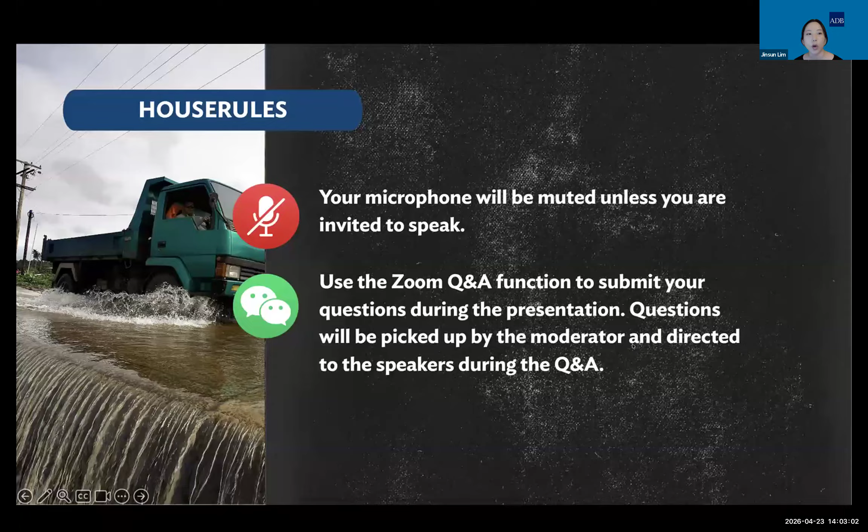This topic is very familiar to me as I was working on it together with the two presenters of today, and we have prepared good manuals on this. As we all know, the increasing impacts of climate and geophysical hazards on road infrastructure pose a significant challenge to roads. To address this challenge and strengthen resilience of roads in Papua New Guinea, ADB has been closely collaborating with the Department of Works and Highways and other partners in Papua New Guinea.

I would like to introduce two lead specialists for the manuals we'll be presenting today. You might know that Theuns and Ian have attended previous Green Roads webinars.

First of all, Associate Professor Dr. Theuns Henning is the Director of the Research Platform for Climate Adaptation and a Senior Infrastructure Management Lecturer at the University of Auckland, where he is also Deputy Dean International with the Faculty of Engineering and Design. Theuns has been undertaking research projects in the area of infrastructure risk management, climate change, and adaptation responses, and his key areas include investigating the interaction of water and road pavements, identifying drainage needs, and various surfacing technologies for mitigating water impacts.

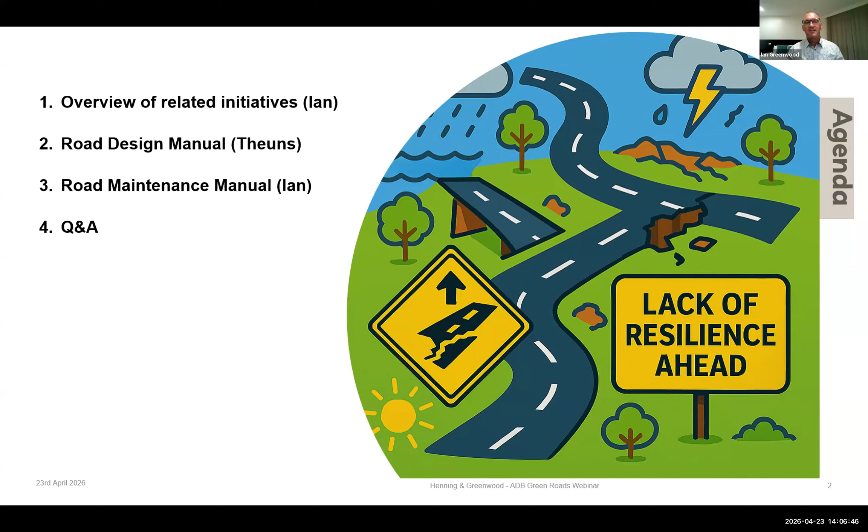It's an interesting slide, this picture here, that PNG's road network at the top end has some very good roads - Port Moresby, and actually up in the Highlands now with a lot of investment over many years, they've got some of their network really, really good. Other parts of their network are incredibly challenged from all the different factors impacting on them. Theuns will go through that a bit more in a while, but we're dealing with a really diverse network here.

Next slide. Against those challenges, PNG is actually receiving a lot of different support from different key players. I don't want to make this sound like an exhaustive list - it's not - but these are some of the key initiatives that we've had to design the manuals around, or with, I guess is a better term, or leverage off, I guess is actually even better still.

So Australia, through the DFAT program, they're up to TSSP3, that's the third iteration of that project funding stream. That's done a lot of work around all the different parts of asset management, supporting the ministry on a day-to-day basis, or the department, doing road condition assessment surveys, asset management competency assessments, and they've been implementing an asset management information system.

They also, around a year ago, in May of last year, released the Climate Change Risk and Vulnerability Assessment Framework, which spans all infrastructure for the government of PNG. Within the ADB, we produced a road asset management roadmap, which brings together all the different initiatives of all the different donors, looking at what needs to be done and who's doing what.

I've been leading a lot of the bridge asset management work, and the work you heard Elco and Travis talk about a month ago, around the network level multi-hazard resilience modelling. The World Bank's been doing OPBRC contracts, ADB has been doing some of those, JICA's doing capacity development, and the government themselves have been doing a lot of work with their Connect PNG program, which is a massive infrastructure program, looking to double the size of the road network over the next 10, 20 years.

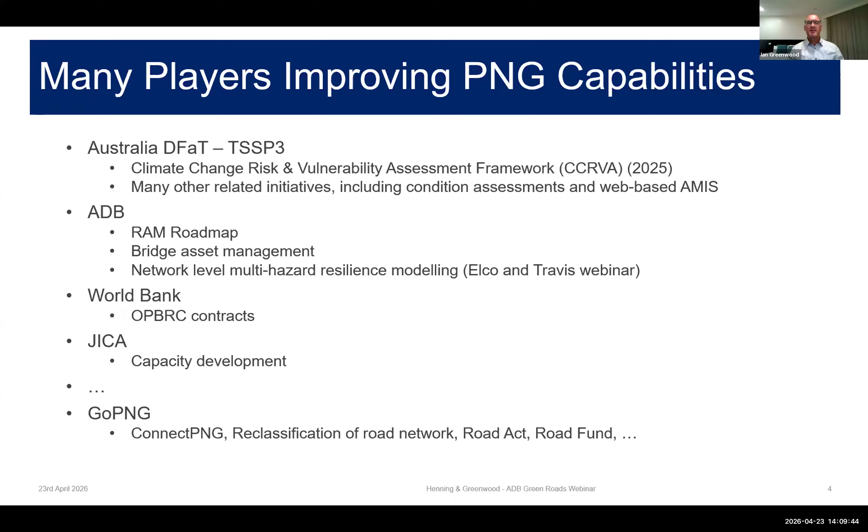They've reclassified road networks, had a strategic road network management plan, done the Road Act, done the Road Fund. The important thing I want to get out of this screen is really, we have not tried to create a manual in isolation from all these different things. What we've tried to do is say, these are all the givens, these are the things we know. So if we flick on a slide, please, Theuns.

So simply put at the top there, we have all these climate scenarios, flooding maps, earthquake maps, landslide maps. Those are fed into the work of Elco and Travis that you heard about, which is our network criticality studies. In the context of PNG's CCRVA, the Climate Change Risk Vulnerability Assessment Framework, that's effectively the top-down approach, that big picture of using those big studies to tell us what we expect.

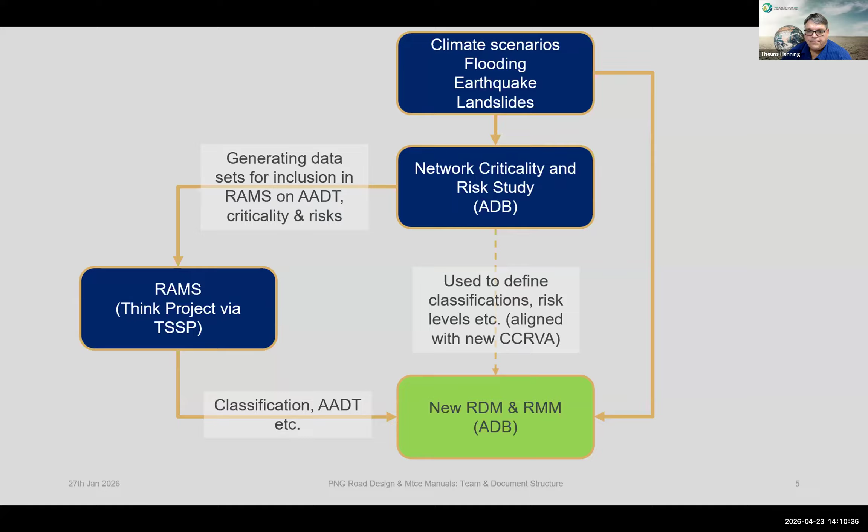That data then has been fed into their asset management system to store it. So we're trying to move away from having reports sitting there that are not usable, but that data then also feeds down into the bottom to give us our inputs to our different design and maintenance manuals. Thanks, Theuns.

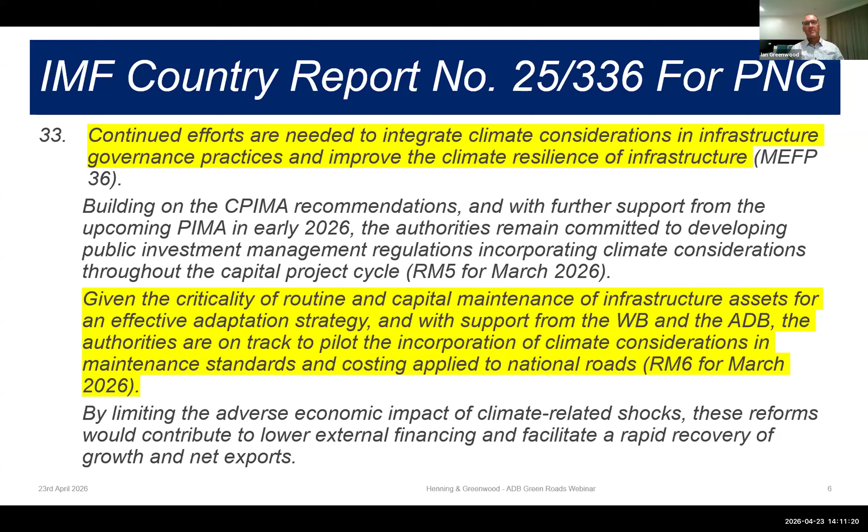The other thing which has been going on in the background is the encouragement from the IMF to actually get climate resilience right across all the different parts of government and into their daily practices. And this was from the 2025 report. The second point there, given the criticality of routine and capital maintenance of infrastructure assets for effective adaptation strategy, support from the World Bank, ADB, the authorities are on track to pilot incorporation of climate considerations into maintenance standards and costings applied to the national roads. So that's very much where we then feed into with these outputs.

And I think Theuns hadn't been to PNG before this, but had worked in Solomons. And then Mananye is the only one who actually hasn't been to or working in PNG for quite some time. Myself, I've been going backwards and forwards for the past decade or so. So over to you, I think that is Theuns.

Thank you very much, Ian. And yes, I can only echo your sentiments around the urgent need for climate resilience in Papua New Guinea, and at the same time also really the good engagement and interaction we had with the government. So I'm going to present now to you the road design manual, and there's perhaps just two comments that I would like to make before we get into the detail.

What I will be going through now is a short introduction into each one of those sections. I'm not going to start presenting all the basics. The purpose of the presentation today is to highlight some of the different thinking and perhaps the focus on climate adaptation and how we brought that into the design manual itself.

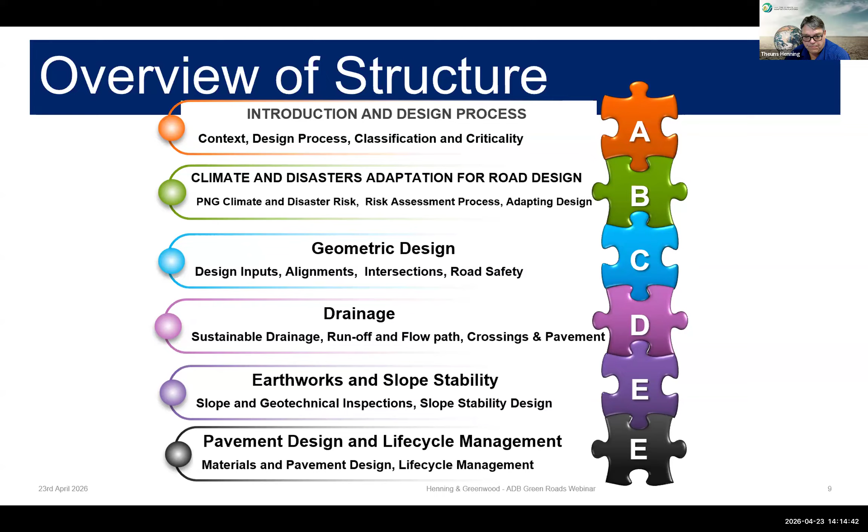Starting off with the introduction, one of the really focus areas for me was to give the designer a strong lead in terms of the decision-making process. We often get the situation that by the time you get to the designer, many of the decisions of the composition of the actual design, the scope and the boundaries may have already been stated, and the designer assumes that is exactly what they have to deliver.

But I think what we try to do with this manual is really to stand back and think, number one, what are the drivers for this investment. It could be a strategic development - typically your capital development works fall under that category - whether you're looking at a rehabilitation, a renewal, a safety improvement, so more the technical improvements, or whether you're looking at resilience improvements. So that's the first point.

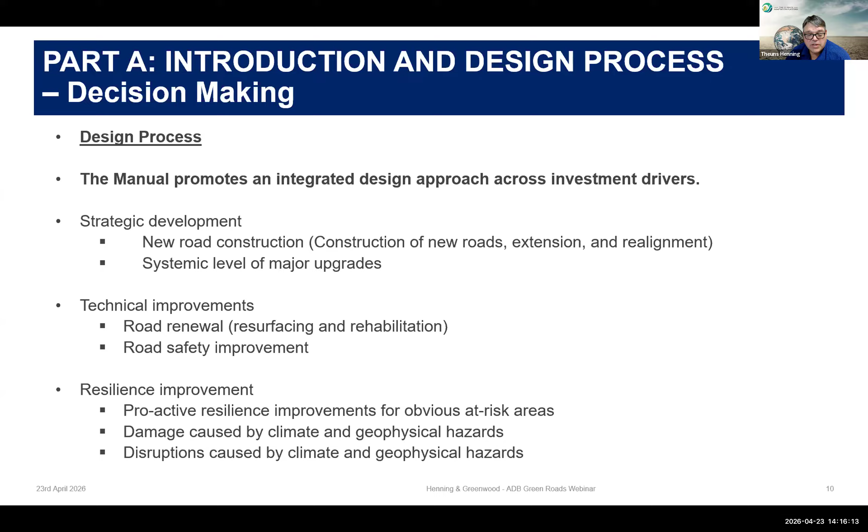The second point is also that we hardly ever do a design for one particular area in isolation. We often have to consider more than one of those aspects when we design, so there is quite a bit of guidance around that decision process in the manuals.

We've also introduced a second component to the road classification. We have adopted the current road functional classification for Papua New Guinea, and there was no reason to change that. But what we have introduced is a resilience classification that overlays the functional classification. As you can see in the table, the functional classification is really there to help the designer understand the design standards and also the intended level of service.

We then also use a criticality rating, and the criticality rating is really there to guide us a little bit in terms of the priority for, say, resilience improvements. For example, you may have two roads that has got exactly the same risk or natural hazard risk, but one road leads to a hospital and the other road just leads into, say, an urban residential area. So obviously the road that goes to the hospital would have priority, even though those two roads may have exactly the same risk.

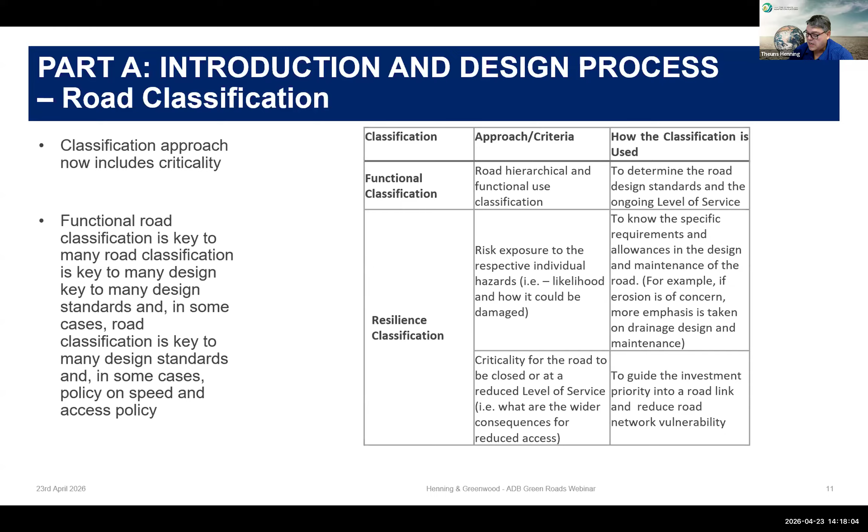Ian, I would like you to just talk us through this slide in terms of the risk assessment itself.

Yeah, so thanks. The CCRVA, the framework that's in place in PNG and which has been adopted by the government, requires both a top-down and a bottom-up approach. The concept we've tried to use is to say, well, how do we make good use of the top-down assessments? The work from ALCO, that study, is essentially our top-down analysis. And in the flowchart, if we work down through it, the first question is: does the actual top-down assessment indicate there is a high risk? This would be repeated for flooding, for earthquakes, landslides, or any other risk you wish to put through it, but it's saying, is there a high risk?

If there's not, then we can essentially do some basic checks. We can check with the maintenance team, we can check with adjacent landowners, and basically say, is there any reason why we wouldn't believe that top-down assessment as being appropriate for this site we're working on?

And if there's not, you can just say that is our assessment, we're working with it. So perhaps a top-down assessment says this piece of road doesn't flood, and you go out on site and go, well, clearly it's not going to flood - it's got good terrain, it's out of the floodplains, you talk to the locals and they say the water never gets anywhere near it. We just want to be able to say, pick that up and use it - that's your result.

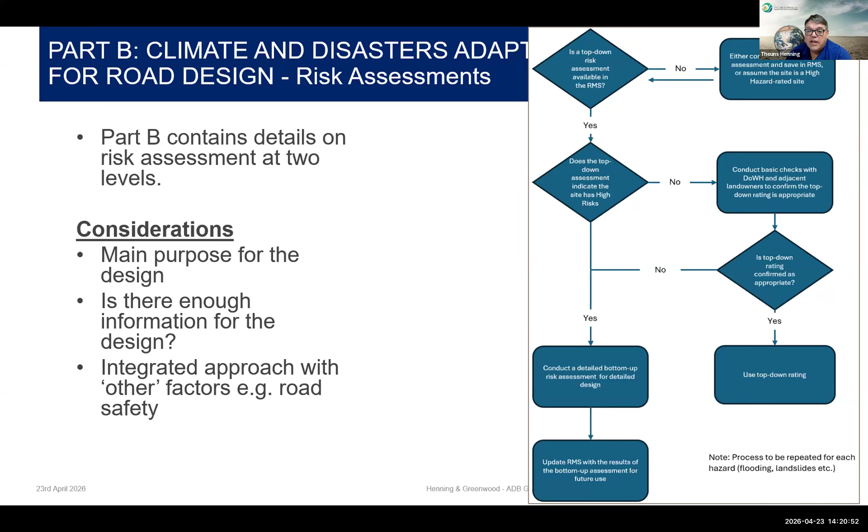In terms of this particular part of the manual, we do cover the exact process of the risk assessment or vulnerability assessment, but often that is done by experts in that area, though it is still there in the manual for reference.

The other area we brought into this part is, once you know what the risk is, you sit back and say, okay, what are we going to do about it? There is a systematic process to understand the appropriate intervention. So typically with a new design, we're going to try and avoid the risk completely, building infrastructure where it's not going to be exposed to future climate impacts.

Then for high criticality roads, we would look at more engineering solutions, treating the infrastructure or applying adaptation designs. For lower risk, we can start thinking about what is appropriate and affordable, doing some pre-event adaptation, and hopefully Ian will get back to this in the maintenance component.

We can also look at protecting our assets. There's then the post-event aspects, where you really have to ask yourself what you're going to replace it with. We're all quite familiar with the Build Back Better or Build Back Different concept, where we think about how to improve future design.

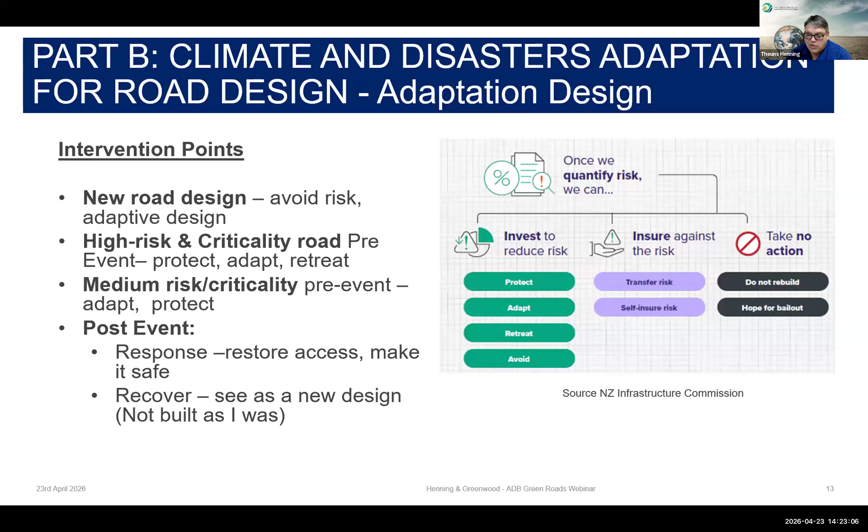We can also think about insuring or transferring the risk through financial means, either taking out insurance or self-insurance. In some situations it may be appropriate to accept the risk and do very little about it, but I'd still encourage focusing on routine maintenance in that area.

We step on now to part C, which is the geometric design and safety requirements. This part is really focused heavily on safety-informed geometric design. The aspects covered include alignment, intersections, pedestrian facilities, and also traffic signs and marking.

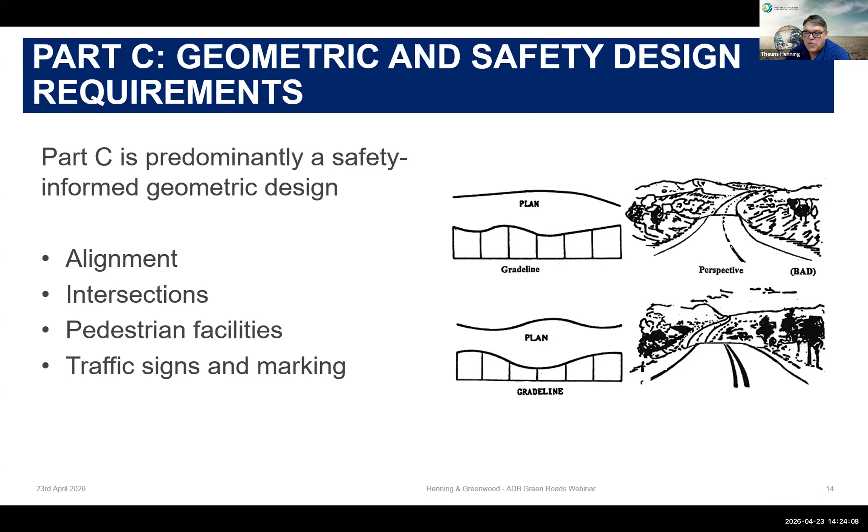The philosophy used is termed the forgiving roads. We work from a perspective that we know things go wrong with drivers. Their vehicle may wander off the road, or there may be some sort of distraction.

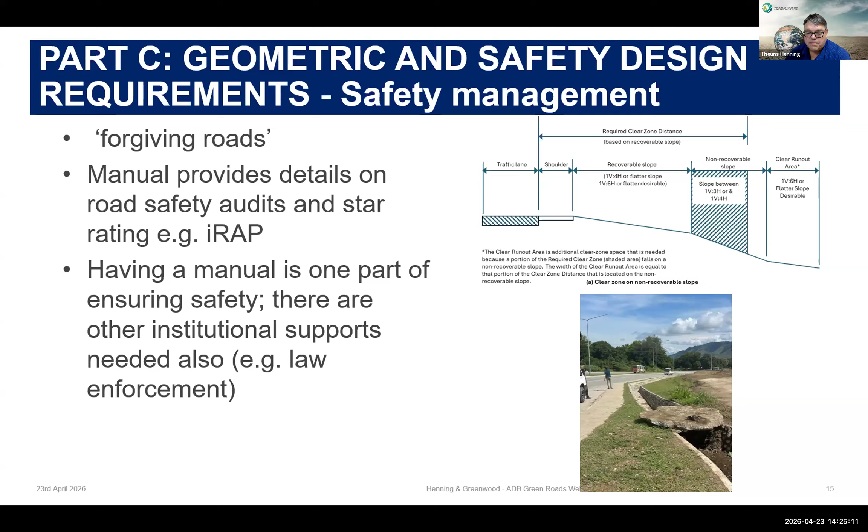Stepping on to the next section, which is drainage design. I think this one in particular is quite an important change, because the traditional drainage design guidelines are mostly based on historic statistics and storm information. We really went beyond that, starting to look into the future.

So there's also a time dimension in this consideration, where you've got to think not only what the situation is today, but with different climate scenarios, what may be the hazard exposure in the future.

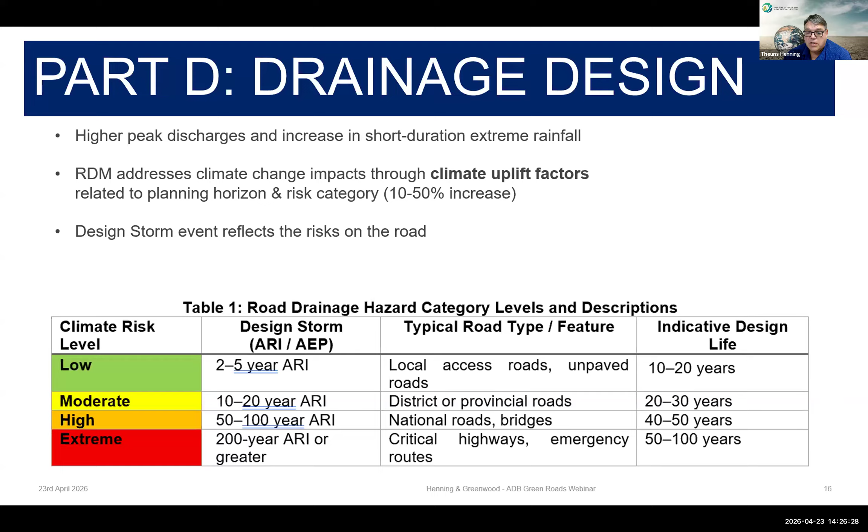Stepping onto earthworks and slope stability, I believe for this section we have largely used material that comes out of Queensland, Australia. They have got very strong guidance in the design aspects and things to consider in retrofitting and stabilizing slopes, and also the typical inspections and surveys required for your slopes.

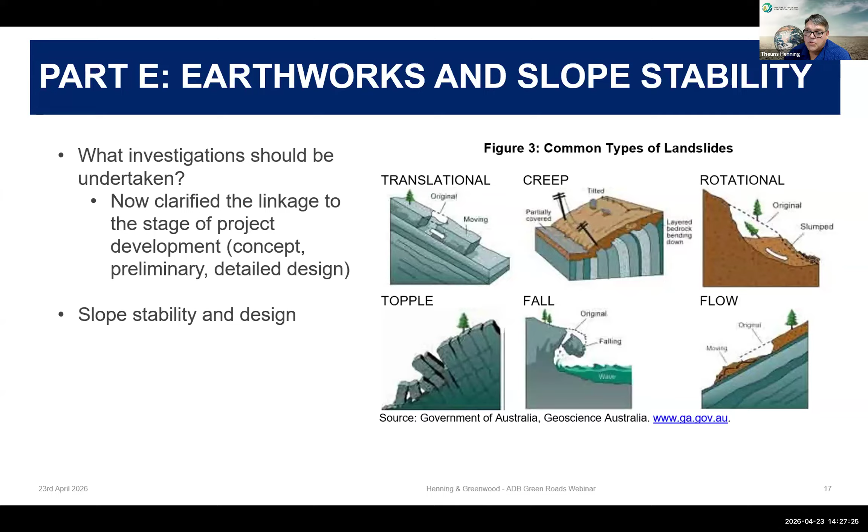This is for me quite an important section. I have done quite a bit of work understanding damages due to storm events, and in roads in hilly terrain, you're going to get up to 60-70% of road closures happening due to slips and rockfalls.

Stepping onto pavement design and life cycle management, there is quite a strong focus on making the right choices of materials and technology for different approaches and situations in PNG. There's quite a varying geology, and of course a difference in the climatic situation between the mountainous area and some of the low-lying swampy areas.

So we've given quite strong guidelines in terms of the technologies to use for varying traffic volumes, but also for climate resilience, the different surfacing type options that fit best for a given situation. So it's not only how to design, but really the first step is what is most appropriate to use in a situation.

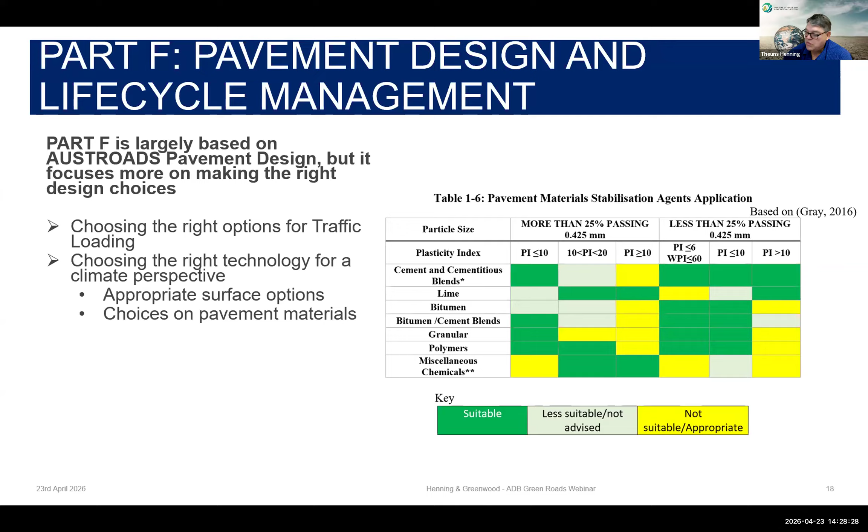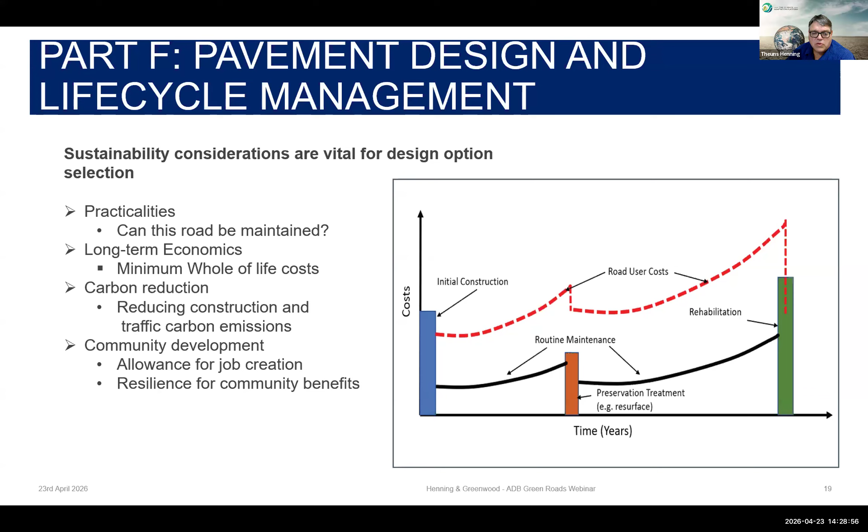We also cover the pavement design and life cycle management with a number of questions in terms of practicalities of the design, looking at long-term economics, carbon reduction for both the construction and in the life, and then community development as part of your sustainability thinking into the future.

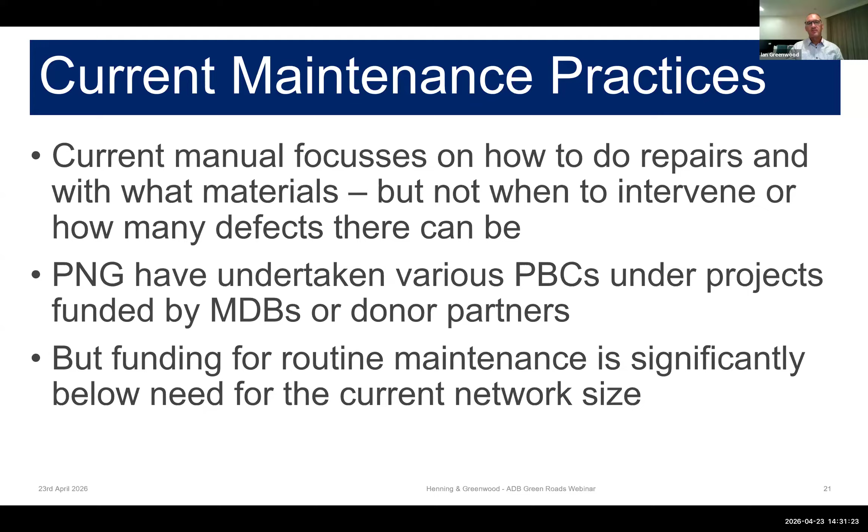So the form of the new maintenance manual that we've looked at - as I said, we're not looking to revoke the existing manuals that tell you how to do things and with what. What we've looked at more is what is an appropriate level of defect for the different risk categories.

As Theuns said, we've moved beyond just saying this is a national highway or this is a district road or provincial highway. What we've said is if this section of road has a high risk rating for landslides, then this is how we should manage the earthworks in that area. Conversely, if it's a low risk for flooding, then we can manage the flooding differently. So we've tried to break it down by the sort of work you're doing.

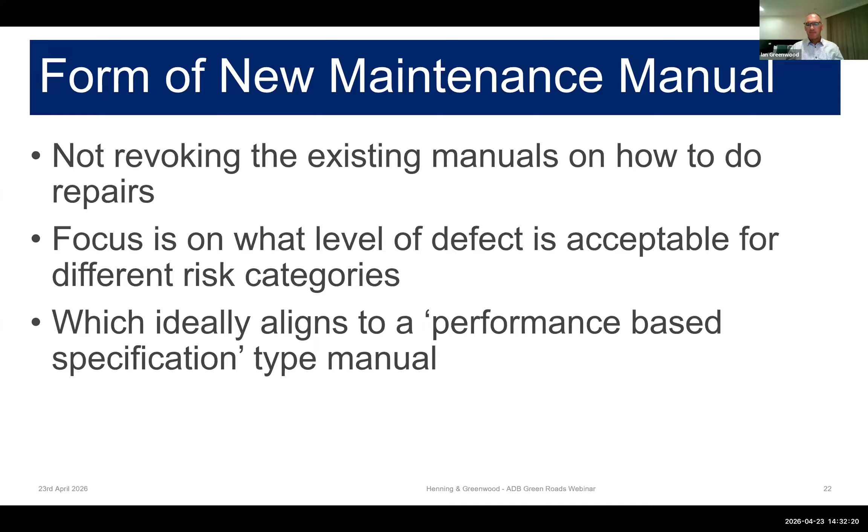That whole approach leads us very much into a performance-based specification type maintenance manual. So the maintenance manual we've got very much aligns with that performance-based approach. There's also an aspect to using performance-based specifications, which go into performance-based contracting, that it's actually a known way to improve the performance of public sector entities all over the world.

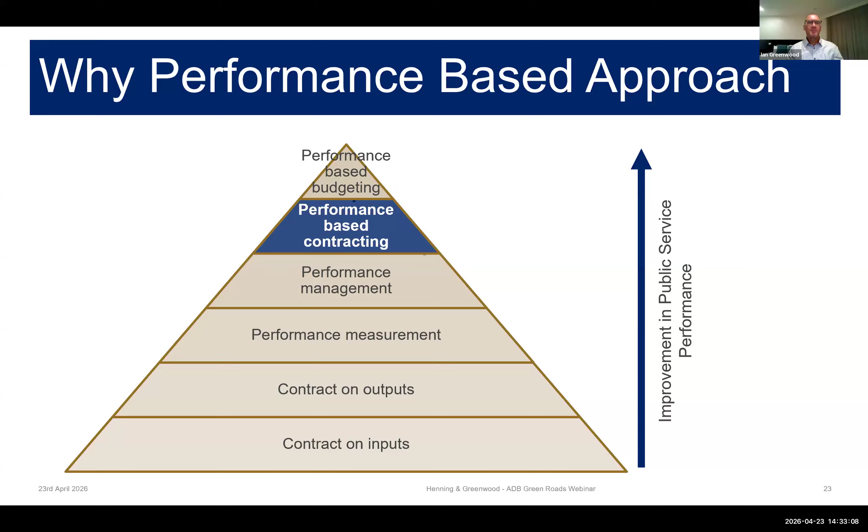Moving from input or output-based contracts all the way through to performance-based contracting is a really good way to drive and improve performance. That's partly because it forces, in this case, DOWH and the government of PNG to think, what do I actually want to pay for? Rather than just doing work and saying I'll spend money until it's gone, actually having that rigorous debate of, I've got this much money, where do I spend it? Where do I do the best with the funds I've got? Whether it's enough funds or not, we should still be trying to get the best value out of them.

Now, it's very hard to say, I filled a pothole, therefore the community's happy, but we're dealing in that middle ground with these specs. Now, the challenge we have had is we've had to deal with the manuals, both the design and the maintenance, in a relatively confined time frame. And we haven't had a lot of time to go back and say, have we set the standards right? So there's still more work to be done to say, have we set our intervention levels at the right level? And does that overall lead to us having the right service outcomes on those roads?

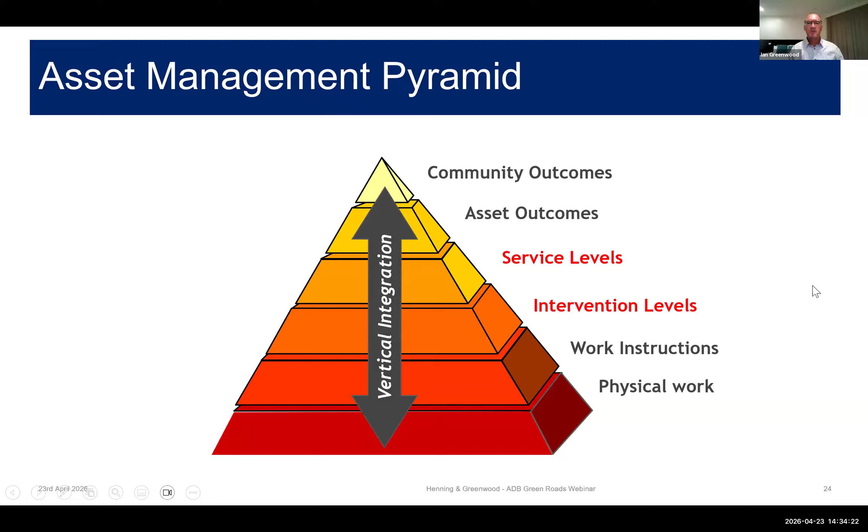The manual itself does assume you've already classified the road as per the road design manual. So that's sort of the given. We haven't repeated that. We've said these two documents share a very common structure. Those who can recall what Tian said about the structure of the design manual will find this one is somewhat similar to it. It's largely aligned with the World Bank OPBRC approach. So again, those who are familiar with that will see terminology consistent.

And we've tried to keep it quite simplified. So rather than having 1,000 performance metrics and everything else, we've tried to keep a focus on a few that we actually think will drive the right outcomes from a resilience point of view and a climate change point of view.

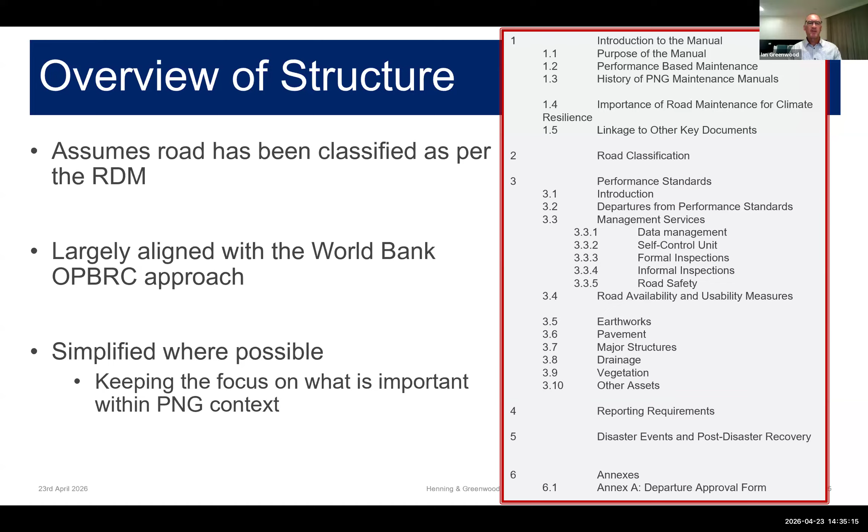The major features you'll see, first of all, is the frequency of actually going to look at the road. It doesn't matter what specifications or manuals you have, if you don't look, you're never going to see there's a problem. And as Tian said, if the road is critical to you, if it's going to a hospital, if it's going to your power supply, your water supply, you need to make sure you're looking at it frequently enough that you know what's going on. If it's a little back road leading into a forestry where nobody's really going, or maybe only traveling very seldom, you don't have to look at it every day. If something goes wrong, it's not the end of the world.

And then we look at our maintenance standards. As I said, they're varying based on the criticality rating of the road, but also varied based on the resilience rating for the given hazard type that's relevant to that standard. And we've suggested that all the high critical routes should have pre-planned detour options to them.

So one thing we know is in the midst of a disaster, whether that's an earthquake, whether it's major flooding events, that's not the time to make your plans. That's the time to put your plans in place. So what we're saying is, as part of the maintenance manual, we would like to see that DOWH have all these different plans in place. So when something happens, the consultants, the contractors, whoever's on site, they say, this has happened, this is how we do this. This is where we put the signs. This is where the detours are. This is who we tell. And when do we take action?

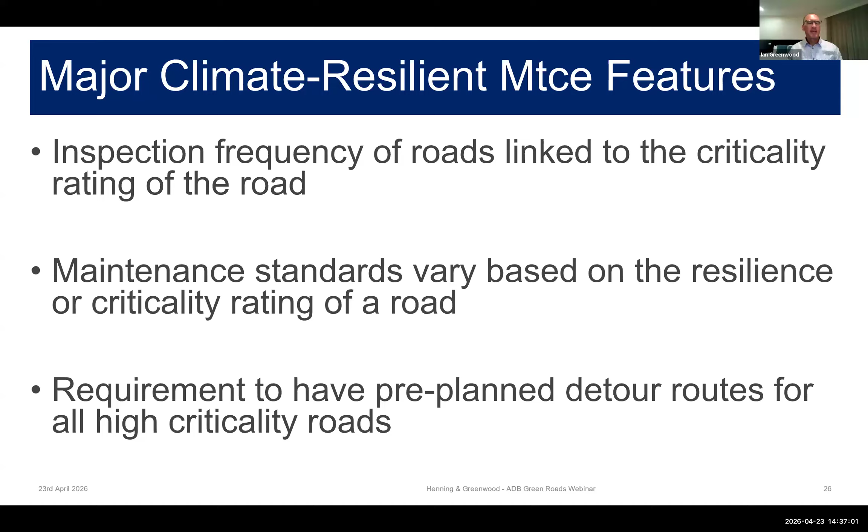As I said, the inspection frequency - if it's a low criticality road, we're saying once per month. Medium, every two weeks. High criticality, we'd like to see it inspected every week. These are formal inspections by the self-control unit, for those who are familiar with the terms, going out and actually saying, are we complying? Do we have an issue? Additionally, the contractor will want to be out there more often, maybe doing daily patrols or otherwise to make sure they comply. But this is our formal inspections to make sure we're compliant with the specs.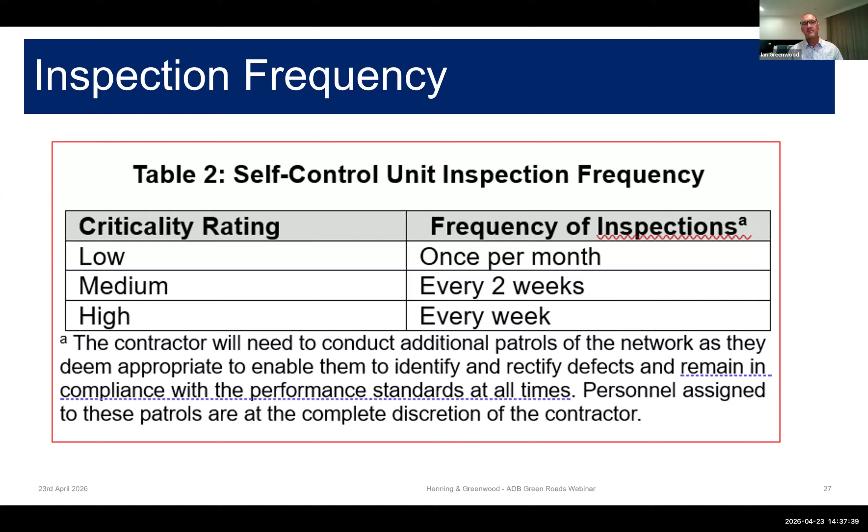The maintenance specs themselves, the maintenance standards, vary. So if we're talking about drainage measures, this comes back to what is the flooding resilience classification. So how blocked or how many blockages are acceptable is now related to the flooding resilience classification for that piece of road.

It's no longer saying, just because I'm a national highway, I have to have it perfect. It's saying, if it's an area that's going to flood, yes, I want it essentially perfect. But if it's not subject to flooding, I can accept quite a few smallish blockages, still not overly blocked, but I can accept a number of them.

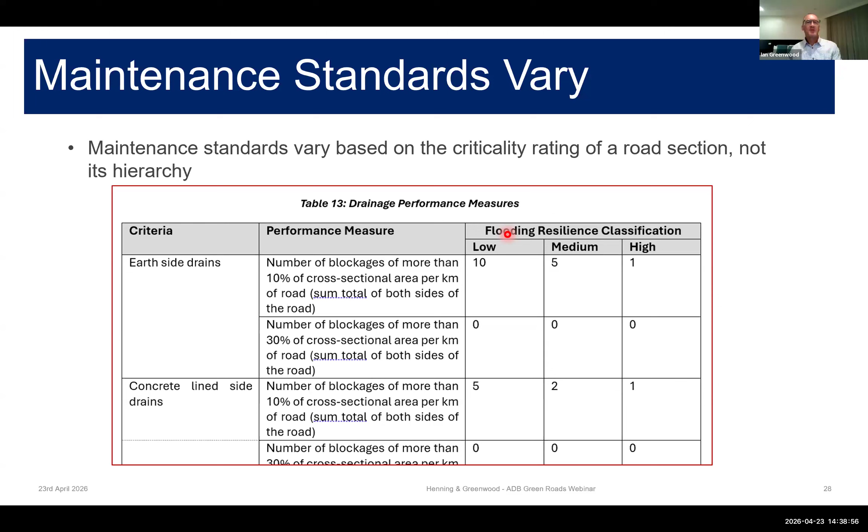And this same philosophy applies across landslides, where we go back and say, what's the risk of landslides? That determines our maintenance standards for them. Earthquakes, you name it - there are some standards that just relate back to the criticality of the road overall. There are some still similar to what you'd have experienced, but where there's a clear linkage between a risk, climate, or geohazard and geophysical risks, and what we'd expect in the network, we've put that directly in.

Some practical guidance on application, looking forward and recognising where we are at timing. As with the design manual, the maintenance manual still needs wider consultation. We've had some, but there's still more to be done. And we need to pilot test the maintenance manual. The ADB, I believe, is proposing to pilot it in July in a performance-based project in the Highlands.

So that's a great first initiative for us to look and say, have we got those standards right? Is there more clarity needed? Should we tighten them up? Maybe there are some extra measures we need to bring through. But we're trying to work this through step by step.

There's also some questions we've got for ourselves and for the industry. Around road safety, as Jen said, it's forgiving roads, and that's built into the design manual. On the maintenance manual, we also have the requirement to do road safety audits, daytime and nighttime, of the existing road to make sure it's being kept safe - not just built safe, but maintained safely.

We are also aware there are very few qualified road safety auditors in PNG. So there's no point saying something has to be done so frequently if we know there's no one around to do it. We want to stretch industry, but we don't want to break industry. So we're trying to look at whether we've got that right, and even how we specify what the qualifications should be for the people doing that.

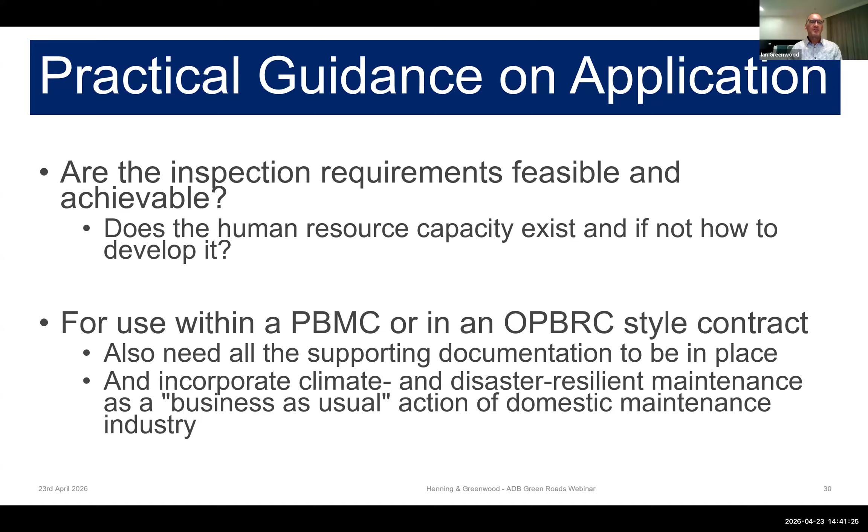And we want to actually get to the point where incorporating climate and disaster resilience in maintenance is business as usual to everyone. It shouldn't just be in these performance-based contracts, but we want to ultimately see it come back right the way through the business.

We also need to recognise, as I said earlier, there are the challenges of funding, and that's universal. I'm not sure of any country I've ever been to who's said, 'Hey, we've got too much money, we just don't know what to do with it.' So the challenges in PNG are the same. They're not just technical - we're still working out some of those questions for PNG.

How do we get the private sector to invest in maintenance? There's a phenomenally big pipeline of work coming through for construction through the Connect PNG program and the work of the ADB, World Bank and others. What are the impediments to actually getting contractors interested in building a strong maintenance capacity alongside the construction capacity? And what's a reasonable timeline to get a competent maintenance industry with the appropriate capacity in PNG? And what are those steps to get there?

So these are some of the bits we're looking at now with PNG, to say - so what? We've got a design manual, we've got a maintenance manual. What do we then do with it? How do you actually build it?

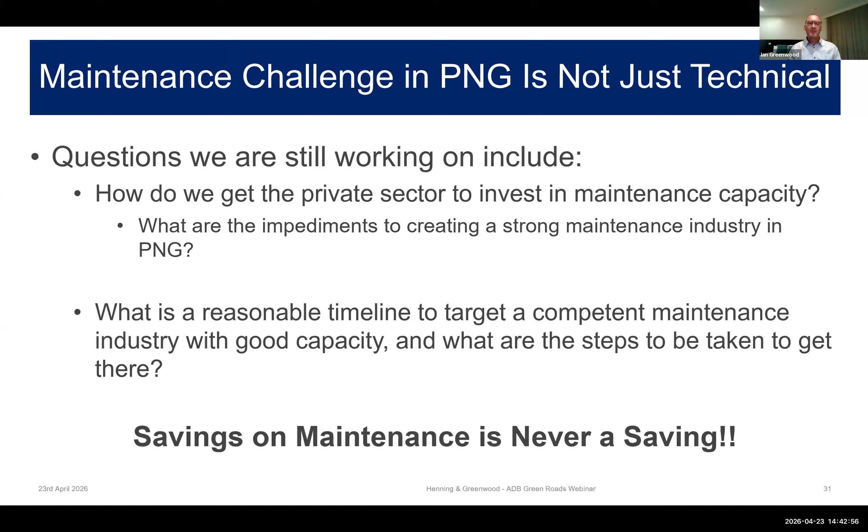I think we all agree, and this has not required any selling at all in PNG - they fully understand that savings on maintenance is not a saving, never is. They've got challenges in being able to fully afford it, but that's different from them not recognising that as a way forward.

So summary, key points: we've got these new draft manuals in place. They incorporate from the ground up those key principles of climate and geophysical hazard resilience. So it's not an add-on, but actually designed around it.

We've designed and developed them to align with all those other initiatives that are going on. So we've looked at the data and the asset management system and how that flows backwards and forwards.

There's still further work to elaborate and develop these with PNG, with the government departments, with industry, and there will be capacity development required. That's for everyone - the department, consultants, contractors - and I should add the development partners, ADB, World Bank, JICA, Aussie. It's got to be a PNG incorporated approach, it can't just be somebody's produced the manual.

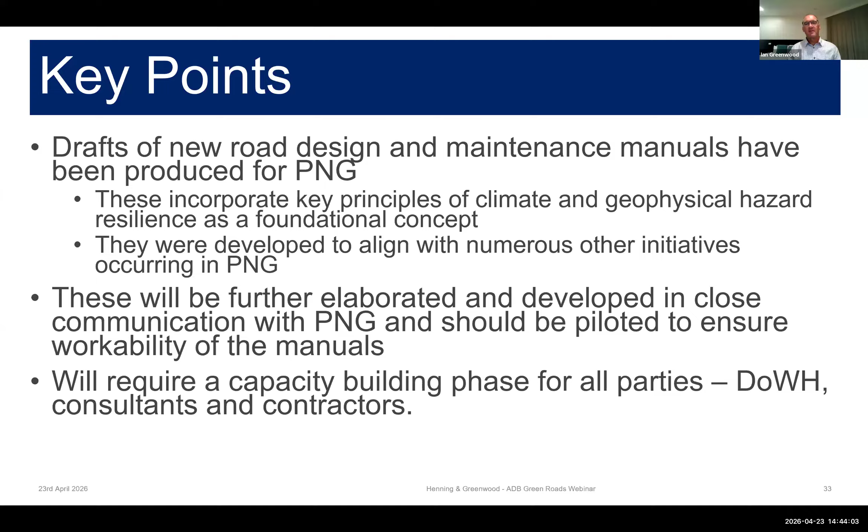So when we've been having these workshops, we've tried to bring across all those different key partners. Hopefully with that, we get to the point where we've got some resilient infrastructure ahead.